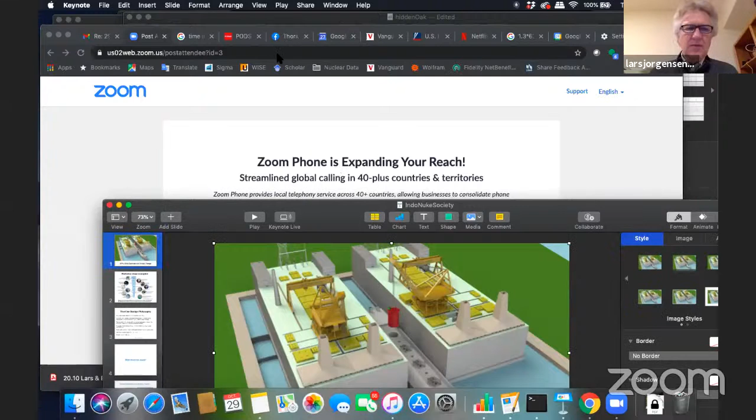What you see here is a picture of two 500 megawatt power plants with a can ship in between servicing it, bringing in fresh fuel and fresh reactor cores. On top, you can see yellow hatch covers. Because everything is low power, low pressure, we can have very large doors - these doors are 10 meters by 10 meters and weigh about 500 tons. So we can lift those up, giving access to all the components and making everything accessible for servicing. This is in contrast to a containment that has to contain high pressure in accidents, where you've got a thick reinforced concrete wall with small doors, and when you want to replace the steam generator, you have to cut through the concrete and steel to get to it.

So in traditional light water reactors, they tend to design things to last forever. We do want them to last a long time, but we have easy access to replace anything if it does need replacing. And some things like steam generators do tend to need replacing every 30 years or so.

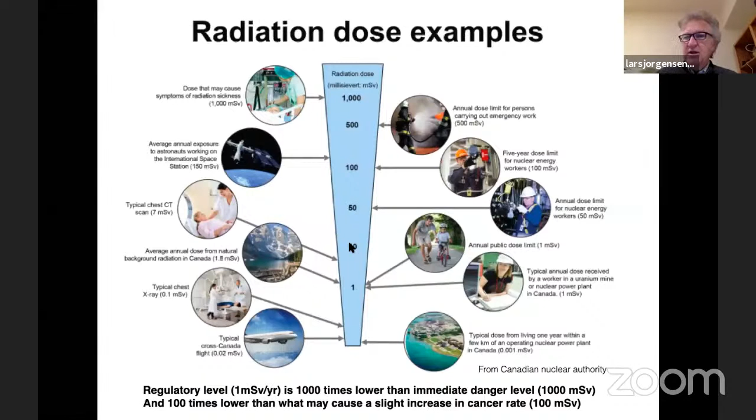It's really important to have the cost and passive safety so that no operator action or inaction can cause a release. There's no electricity or machinery required to prevent a release. I think that's important, not just from public perception of safety, but also from a cost viewpoint, because if we can have full passive safety, then the quality and regulatory review of the vast majority of the plant goes away.

And we're trying to directly compete with coal for cost.

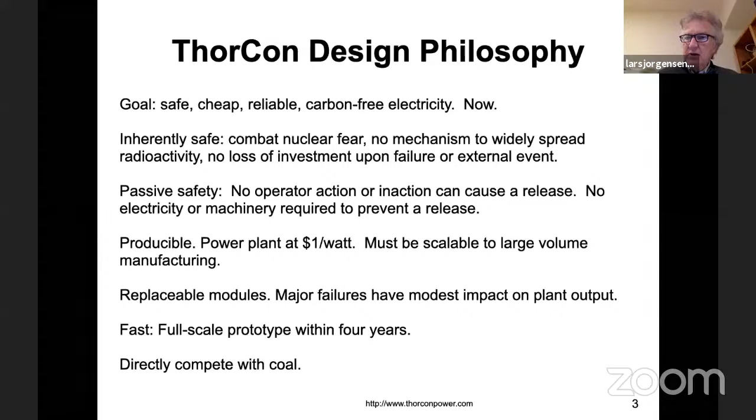A big topic is, what about the waste? The anti-nuclear activists have made a huge fuss over this, but I think it's important to understand just how much waste we have. If you look at the average electricity use for European or US, it's around 1 kilowatt on average, including industrial use. So if you look at how much that amounts to for 60 years life, that would be about a 600 milliliter bottle of water. That's your entire life's waste. Helping people understand how little that is, and therefore how easy we can control it, is an important thing we need to do.

If you were to generate that same electricity with coal, you would fill a 4 meter by 5 meter room, 300 meters tall, higher than the Gama Tower. It's the best illustration I can think of to say we generate very, very little waste. Our waste story is actually a positive thing.

See, can I make this go away? There.

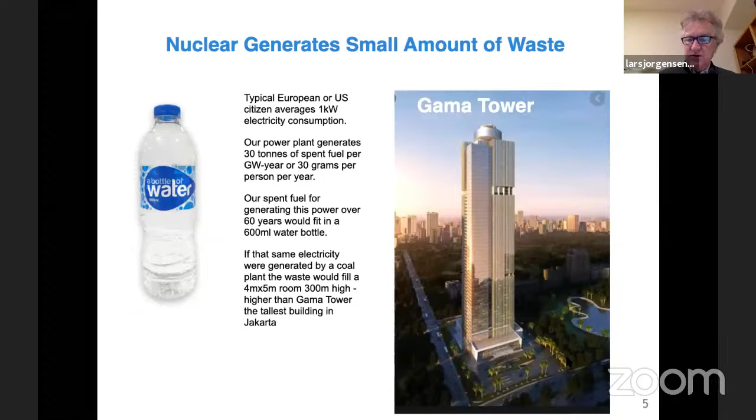In fact, we added 5 meters to the length of our hull. It used to be 175, now it's 180 meters long. Right here you can see some tall, thin tanks. That's where we're going to put our spent fuel for 80 years. It's the equivalent of a dry cask storage system. It's air-cooled by natural circulation, so we have an air inlet here and air exhaust there. It's protected by a 3-meter thick double wall hull that's filled with either sand or concrete. And we can store that until we're ready to do something else with it.

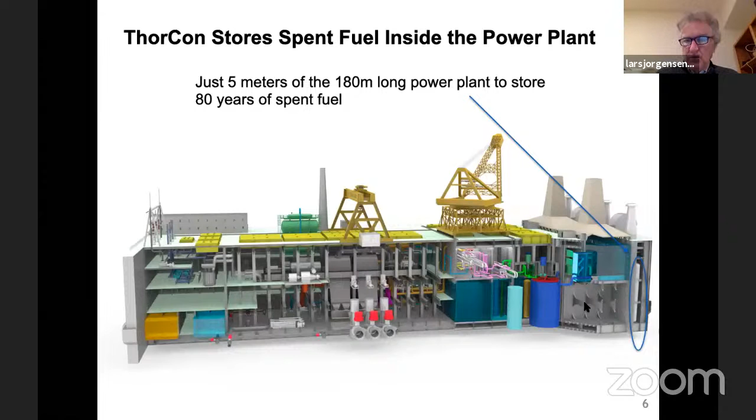By something else, the question is, what do you do for the very long term? I'm preferring the horizontal drilling method, taking advantage of the technology developed for oil exploration, where you drill a deep hole and then turn it horizontal and put the spent fuel in there. A single small island, in fact probably a single drilling rig, can handle all the waste from all of the nuclear power from Indonesia, even if you go 100% nuclear. So that just emphasizes how little waste we actually have to deal with.

The long-term disposal is actually the responsibility of BATAN, as I understand. So this should be taken merely as a suggestion, it's not really a plan. To be honest, we don't have to have the complete plan today, because we can store the stuff for 80 years at the power plant, and you can store it longer in dry cask storage if you wish.

Another huge issue is the cost. In order to make any big difference, we really need to be cost competitive with coal. If you're talking costs in the $5 to $10 per watt range, it just isn't going to be low enough cost to make a big difference in most of the world.

On the left, you see a picture of a ship that we designed and built. It's an ultra large crude carrier, one of the largest oil tankers in the world, double hulls. We built 4 of them. They were architected and the construction managed by Jack Devanney. He's the founder of Thorcon. They are almost twice the size of our power plant.

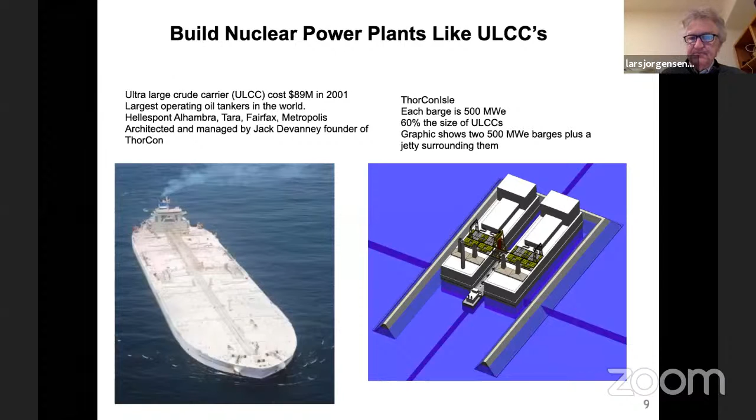If I look inside, I can kind of walk through here. Here's the spent fuel storage. This pond here is for removing decay heat, transporting the decay heat to the atmosphere. This is the reactor itself inside here, along with the pumps and everything else that's in the primary loop. So this is where the fuel stays, except when it's being shipped over to the spent fuel storage.

Then this is for off-gas storage to let it decay. These pipes, all this maze of pipes, are heat exchangers to take the heat from the reactor core and propagate it down until it becomes steam. And then this section here is the turbine.

Along with seawater inlet, there are 3 seawater pumps. We need 2 of them to run at full power, so it's a 3 by 50% plan for the cooling water. And then you have the generator, and then transformers and the switch yard. We use gas insulated switching gear in order to be able to fit the whole switch yard inside the power plant, rather than having a large area on land that is air insulated.

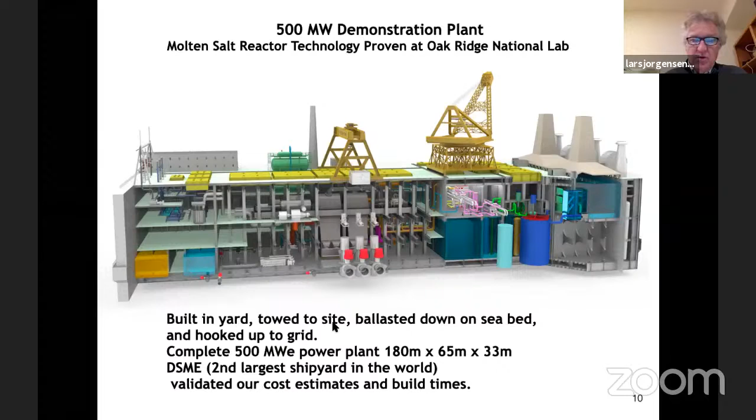So this whole thing can be built in the yard. It would be built in less than 1 year and on a fixed price contract, which is very different than current nuclear practice. Towed to the site and ballasted down to the seabed and hooked up. We've had our costs validated by DSME, who's the second largest shipyard in the world, so we're pretty solid on our costs.

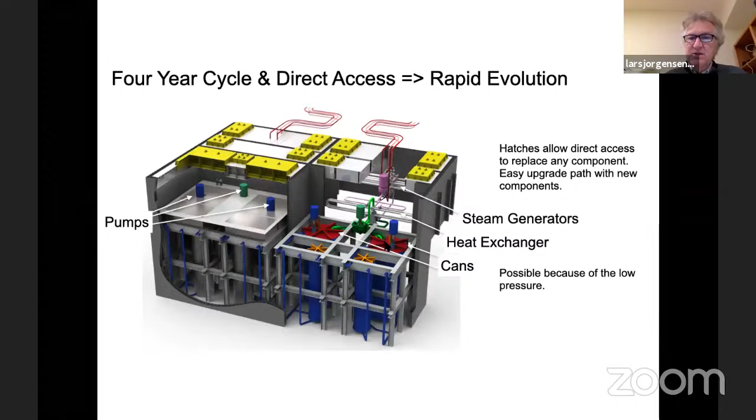I have a 4-year cycle of cans, because inside of it we have graphite, which does wear out. So we plan on using it for 4 years and then letting it sit and cool for 4 years, and then take out the can and replace it.

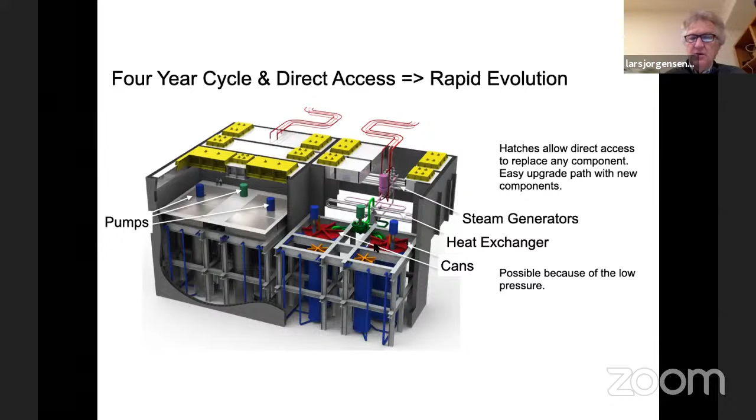This shows you the primary heat path. You have the pot, which is the reactor vessel, a pump, and then a primary heat exchanger. This all sits inside - we call this the primary loop. Then it goes to a secondary, heat is transferred to a secondary salt. It's also sodium fluoride, beryllium fluoride.

We use sodium fluoride rather than lithium fluoride because we haven't seen the availability of enriched lithium-7 on the market yet. If we can get that, we can switch the salts and everything else stays the same, but we don't want to put waiting for the lithium-7 onto our critical path. It means we have to buy a bit more enriched uranium, but it takes out that schedule uncertainty.

Then that goes to what's called a solar salt that's used in solar thermal plants. This is a nitrate salt that is compatible with water, so you have steam here. So the steam generator is from the solar thermal industry. It is what's called a helical, but it's really more of a snake pattern to be able to absorb rapid temperature changes.

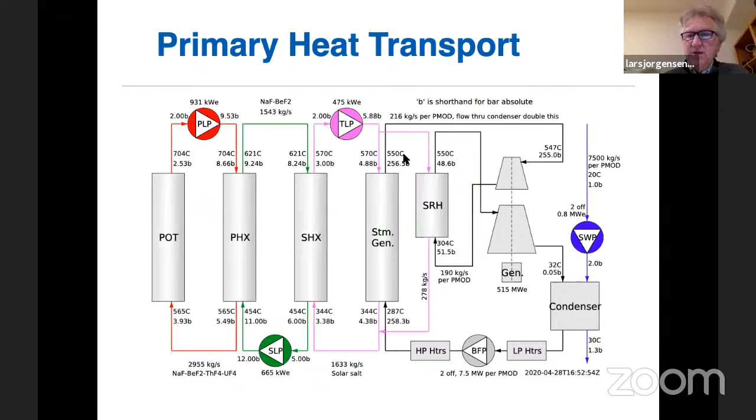This just shows you where it lays out. So here's the reactor core, the pump, the heat exchanger going to the secondary salt with its pump, going to the heat exchanger to the solar salt, which then makes the steam and goes off to the turbine. And here you can see it in context - these would be the high pressure feed water heaters.

This gives details on the steam generation side. I'm just going to highlight that we're up at over 47% efficiency if you have 20 degrees C water. It's about 46% if you have 30 degrees C cooling water. So depending on how deep and cold we can get the cooling water, we get different efficiencies, but this is in big contrast to light water reactors, which are around 35% efficiency, which means we need a lot less cooling water, fewer pumps. All of the equipment to transport the heat is similarly scaled down.

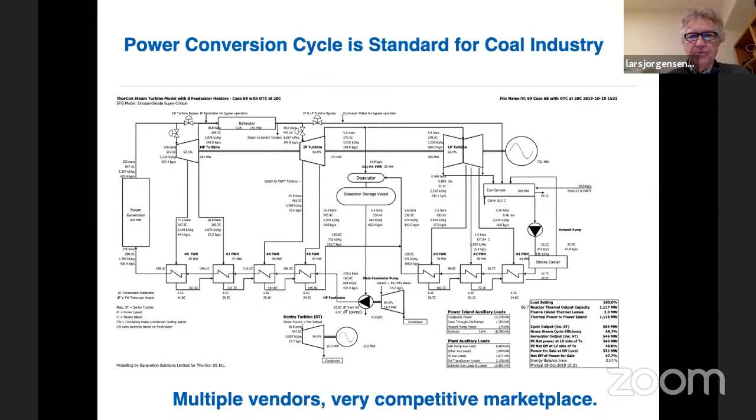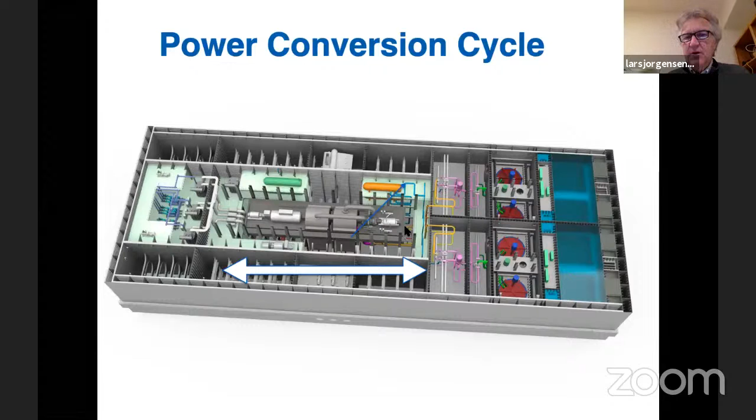If you look at the whole power plant, the turbine generator makes up a big portion of it - that's this section right in here. And that portion is going to be directly cost competitive with what's used for coal because we're buying it from the same vendors.

Get inside the can. We have the reactor vessel itself. It's not quite spherical, but it's not too far from. It's filled with graphite inside.

Salt enters at 565 and comes out at 704. It goes through the pump and the heat exchanger. This is a can for the off gas.

We have a flow of helium that comes in through a dry gas seal that flows down. That prevents radioactive gases from being able to migrate up into the motor area. And then that sweeps the xenon and krypton that comes off of the fission process over into this off gas tank. So we have enough storage here for the first week of decay time.

We remove about 4% of the salt flow to send to a spray ring to release the off gas from the salt. Xenon and krypton have a very low solubility in the salt, so spraying it does release it. And then that comes out at about 1 liter an hour, and the sweep gas goes by at about 1 to 2 liters per minute to sweep that off and into this tank.

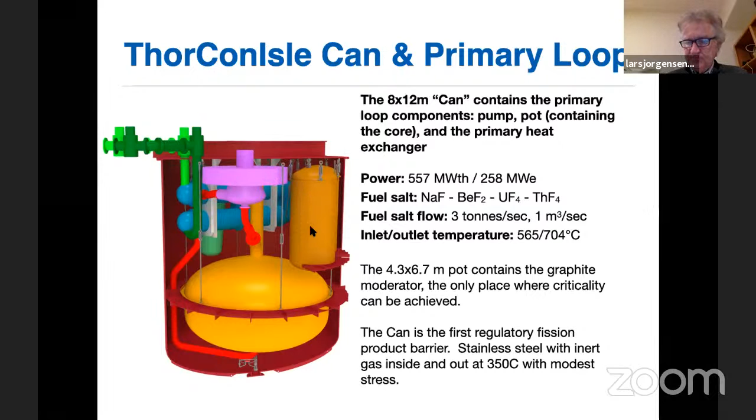So there's a total of 15 cubic meters of fuel salt in the primary loop. We have a makeup fuel tank that's about 2 cubic meters. The fuel in the core is just enough to be critical.

So we don't have any burnable poisons. Instead, we add on the order of 1 liter of makeup fuel salt per day. That gets added several times each day. So there's no excess reactivity in the core.

We also have about 1 cubic meter of thorium makeup salt to reduce the reactivity. That's important because when you're running the power plant, you're pumping fuel salt out of the core, and you'll lose 200 to 300 pcm of delayed neutrons. When you stop the pump, that reactivity comes back, and we need to add thorium to compensate for that so that we don't get too hot.

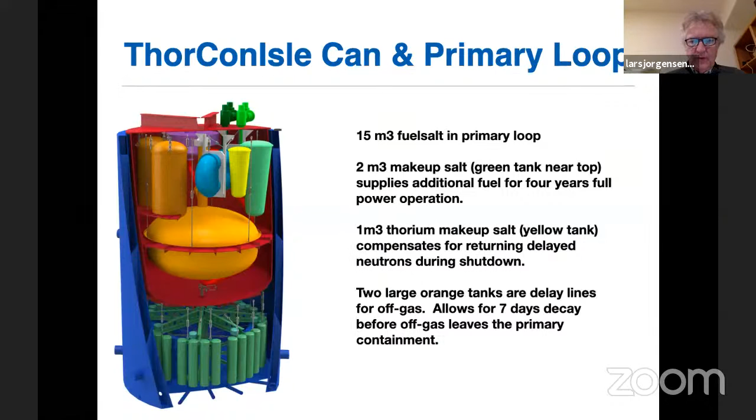Down below, we've got a freeze valve, which you can't really see here. The freeze valve is frozen salt in a pipe that is kept frozen by actively pumping cold helium to keep it closed. If you stop pumping the cold helium, the heat capacity of the hot salt adjacent to it is sufficient to open that valve.

So if anything breaks that cuts off the flow of helium, we're going to end up opening the valve and draining into these 32 drain tanks. As you can see, they are spread out so that once you're down here, K effective is about 0.5 or 0.6, even if you surround this completely with water. So once it's drained, you know absolutely it is not critical. It will not become critical.

The drain tanks are surrounded by an inert gas, probably argon, and then that radiates out to a steel tank wall here, and inside that is 0.5 meter of water. So that'll boil the water and send the steam up the path here through the pipes to a radiator on the bottom here, which will transfer the heat into this water and evaporate that water.

There's 5,000 cubic meters of water for a 555 megawatt core. That's about 10 times as much water as the AP1000 has. That means we have enough water to last us for 165 days. This is at atmospheric pressure, so anybody with a pump can push more water in.

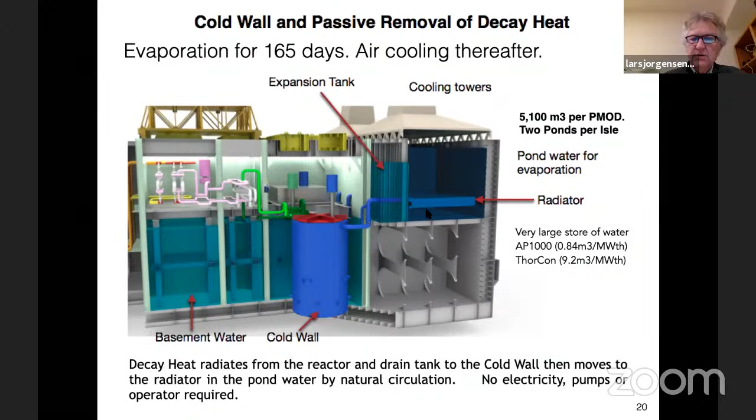We do plan on building a full-scale pre-fission plant. We can use that to test all manner of tests. There's no fission, so there's very little radioactivity, but we can use electrical heat and confirm that we do all the necessary cooling and containment. We can even simulate severe tests by adding electrical heat to mimic the decay heat and show that it does indeed remove the heat and that the valves and everything open passively.

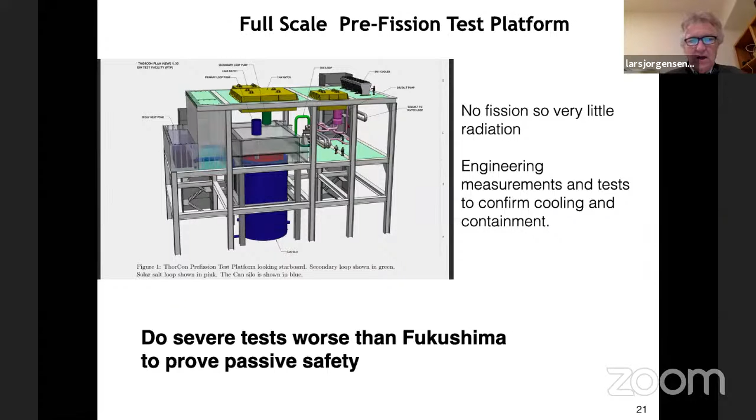First step is just to simulate it. This is a simulation we have of the system showing the temperatures in a whole variety of locations in the power plant.

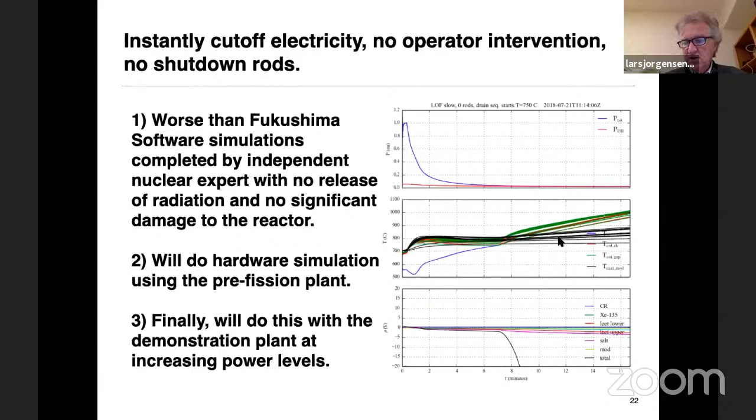We do plan, once we have first run things through simulation and then through the pre-fission plant and then through the demonstration plant at low power and stepping up into higher powers, until we have done this full station blackout with turn off all the electricity instantly, stop the cooling water, no operator action. This is much worse than what happened at Fukushima.

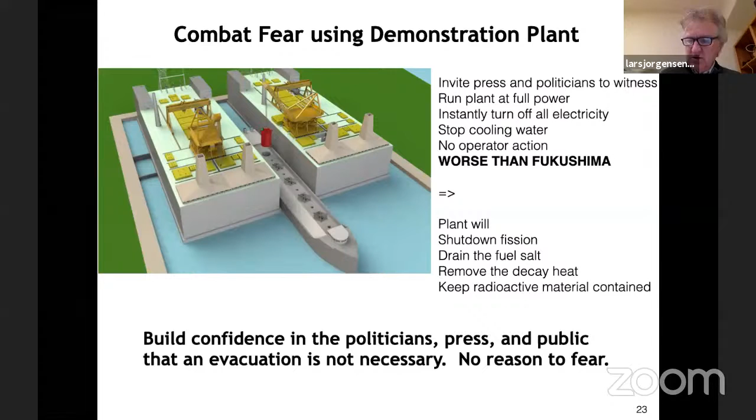And do that with the politicians, the press, and the public present, so that they get not just a reassurance from words by engineers, even the regulator, but that they get to have personal experience and they feel it, I want to say, in their heart. It's not just head knowledge, that the plant will take care of itself and they don't need to do a big evacuation, which, if you look over time, that's been the major harm from nuclear accidents. It has not been the radiation, it's been the evacuations that have caused the most harm.

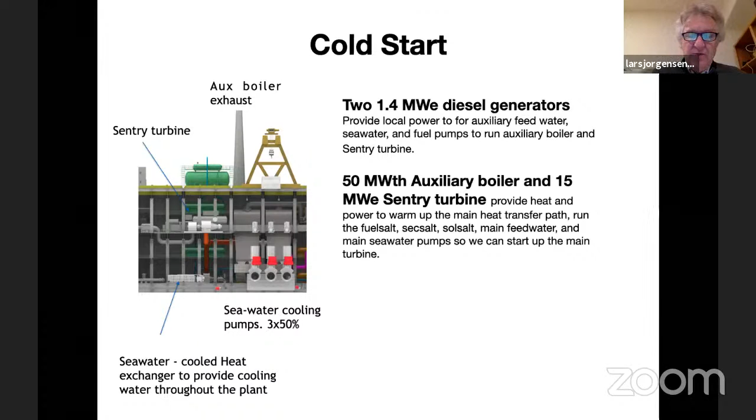We are designed for cold start, so we have 2 1.4 megawatt electric diesel generators. Those are enough to provide local power to start the auxiliary feed water, seawater, and fuel pumps. Those will drive an auxiliary boiler, which is basically a diesel boiler to provide 50 megawatts thermal. And there's a small Sentry turbine of 15 megawatts. That's enough for us to heat up all the salt and get all the pumps going to start the fission process. So we can start our power plant and bring up the fission island with even if the grid is completely down. That's for a full cold start.

Once we're up, if the grid goes down, we can go to hot standby, where the power plant goes to minimal fission power, but we keep all the salt loops moving. And we can tolerate many hours worth of outage and then come back up and ramp the heat up, so we can be the hot standby black start capability that was so wanted for Jakarta in that outage a year and a half ago or so.

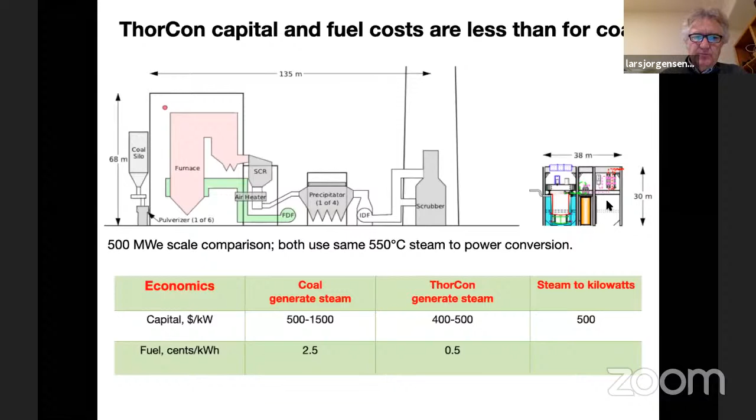So we build it in a shipyard, tow it to the site, ballast it down, and then every 4 years come and service it to bring in new fuel. The shipyard initially will be an established shipyard. That is our factory. We don't have to design a new factory and debug it and bring it up the way a lot of small modular reactor plans are. We use the existing shipyards. They've been perfected for 40 years. It's an intensely competitive field, and they've got a lot of surplus capacity right now. So it's a good time to go negotiate with them.

We have already talked with DSME, and they are willing to set up a shipyard in Indonesia that would build the power plants. So once we've got the first several built and know what we're doing, we'll bring some people over to train at DSME, and then DSME will go over to Indonesia and build a shipyard there and initially staff the lead positions, eventually being replaced by Indonesian staff and running so that Indonesia builds its own power plants and builds them for export.

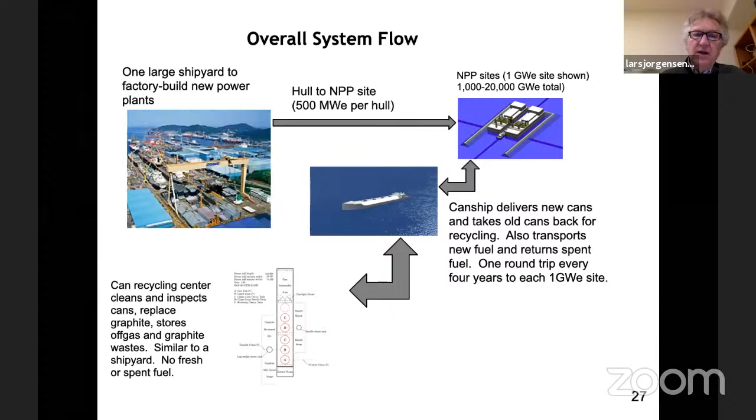And I'm running low on time.

So a good-sized shipyard can build 20 gigawatts worth of power plants per year. Light water reactors, I don't think the entire world could build 20 gigawatts worth of light water reactors a year. There just isn't enough huge foundry space.

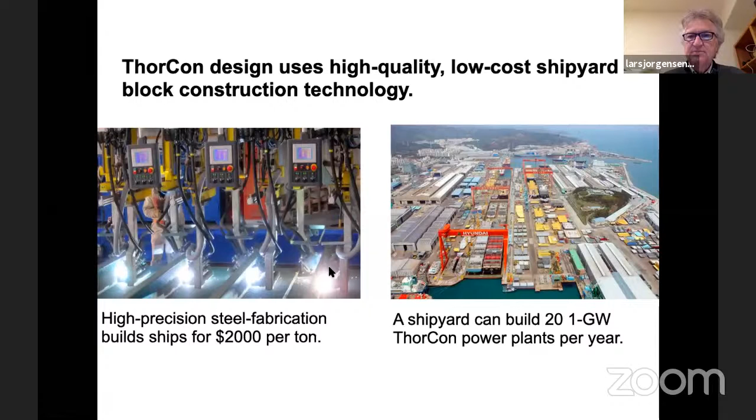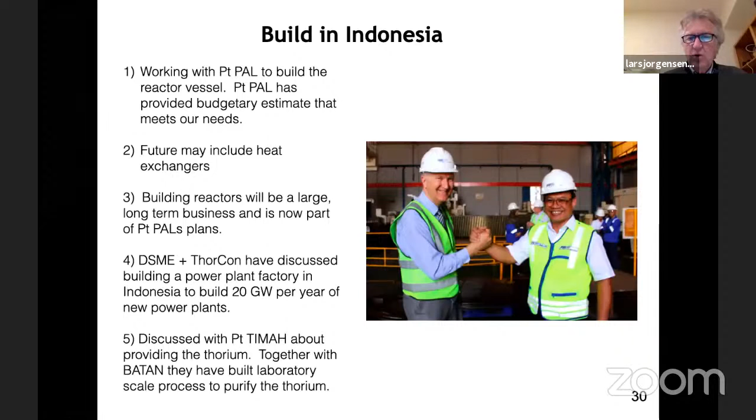We're working with the national labs to build sensors and to make salt measurements. Those contracts are getting close to being done now. We've worked with PT-PAL to look to see if they can build the cans and the stuff inside. We believe they have the technical capability. We still need to work more with them to work out the details, but that looks very promising.

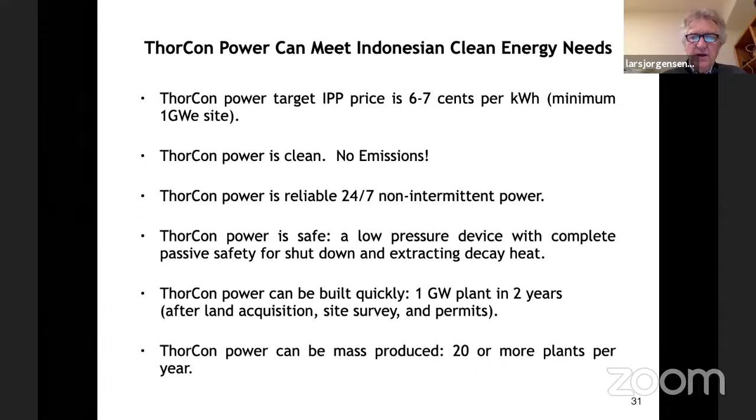We think we can hit below 7 cents per kilowatt hour. So we've been talking with PLN a lot about that. Recent progress, well, we went to DSME and confirmed the costs with them as well as Doosan.

The steam generator is designed in Denmark and is built for solar thermal plants. That's looking pretty solid. We've been working a lot with Materion, the world's premier supplier of beryllium fluoride, to work out details for that. We are progressing with the laws and regulations in Indonesia. Bob's been doing great work moving pieces to be ready.

We are in discussions with an international organization for a safety review, and we're just about done with our contracts with the national labs. That's the end of this part of the presentation. I think I used all my time.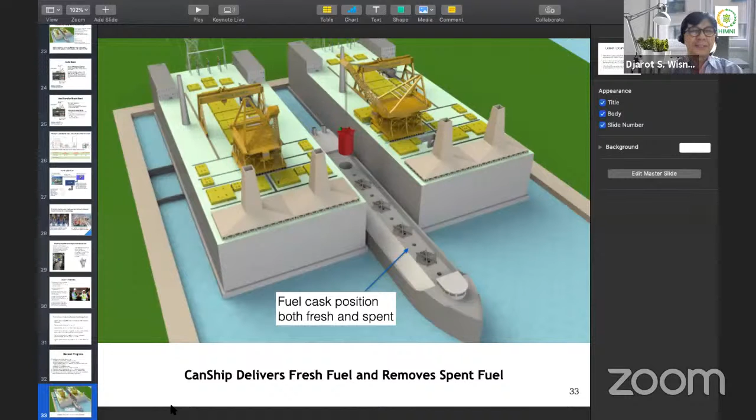Okay, thank you, Lars. Well, it's very interesting. Your goal is not to be competitive with the pressurized water reactor, but cheaper than coal. It's very interesting. And you also consider, well, based on the proven technology of the experimental molten salt reactor of the Oak Ridge National Laboratory long time ago, in the 1960s, I think they operated that reactor.

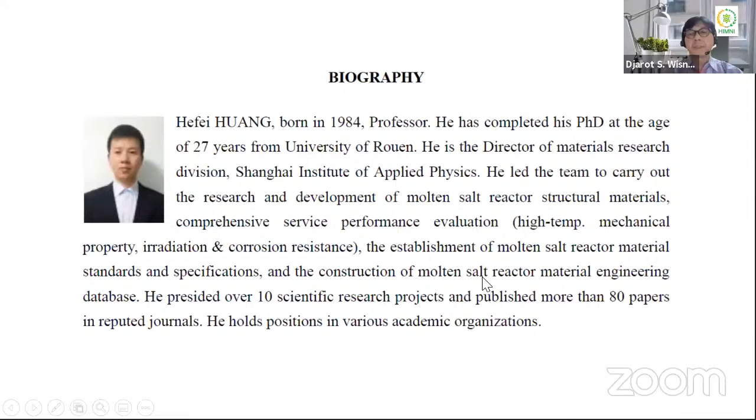Okay, thank you very much for the introduction. Can you see the slide? Yes. Okay, good morning and good evening, everyone. I'm really glad to have a chance to introduce the presentation here. Today the title of my presentation is the progress of the TMSR in China.

This presentation includes 4 parts. First of all, I will introduce what is the MSR, and then the motivation, the progress, and finally the perspective of the TMSR.

The TMSR project was launched at the beginning of 2011 by the Chinese Academy of Science, and the full name is Thorium Molten Salt Reactor Nuclear Energy System. We call it also the TMSR. The aim is to develop thorium energy and non-electrical application of nuclear energy based on TMSR during the coming 20 to 30 years.

This slide shows the TMSR development plan. We have already finished the mock-up reactor before the end of 2019. Now we are constructing the test reactor, the 2 megawatt thorium liquid fuel test reactor. We call it TMSR-LF1. After we finish this, we are now applying for funding to support the research reactor, which should be finished around 2030.

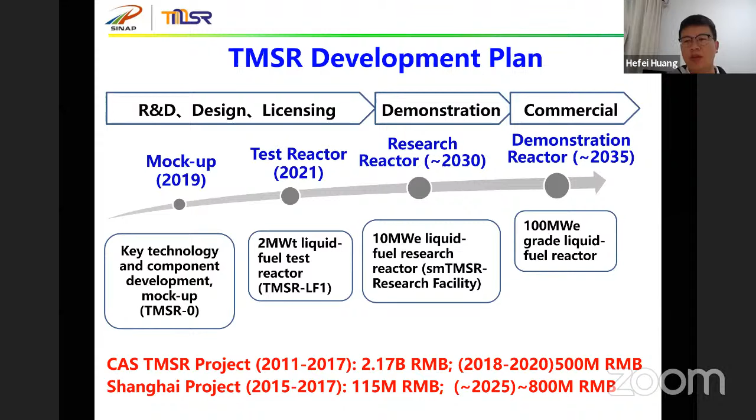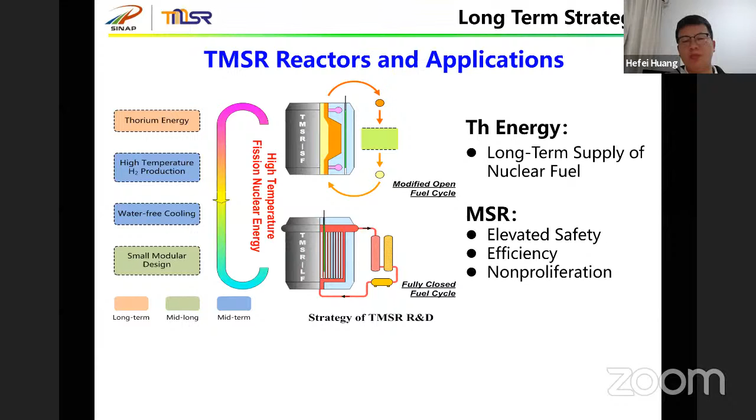The TMSR reactor possesses a lot of advantages, such as thorium energy use, high temperature hydrogen production, water-free cooling, and small modular design. Our TMSR application will focus on optimization for high temperature based hybrid nuclear energy applications, and also for utilization of thorium with prior processing.

So next is the motivation for the TMSR. This slide shows the energy structure of China before the end of 2012. We can see there are more than 620 coal-fired power plants, and the total accounts for about 66% of China's total energy consumption. So coal dominates primary energy consumption in China.

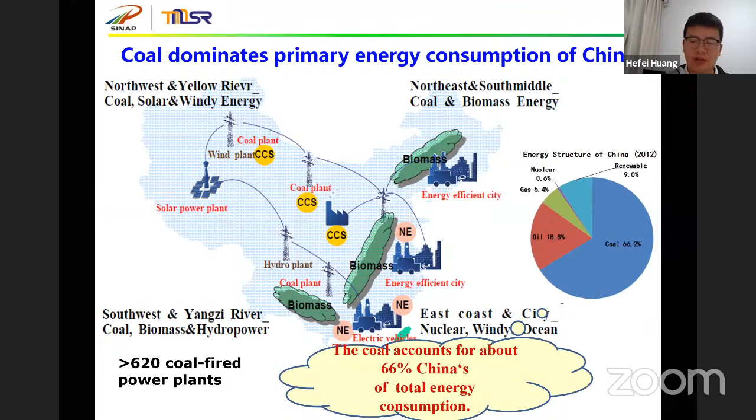We can also see at that moment wind was abandoned in China. Much of the electricity produced by vast wind farms goes unused. The grids are unable to accommodate the fluctuating source of power and the rising overcapacity in the country's total power generation.

From 2010 to 2016, 150.4 million megawatt hours, or as much as 16% of wind generation, was curtailed. The opportunity cost of wind power curtailment in China is estimated to exceed 1.2 billion US dollars.

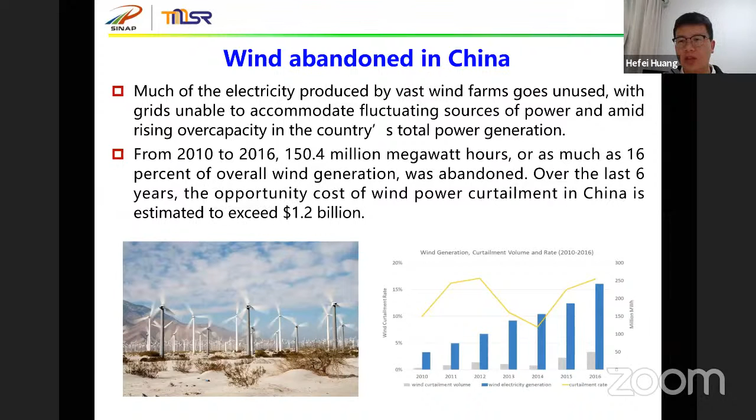So now we propose a solution: the clean energy system. The nuclear energy system produces heat and/or electricity. The renewable energy system produces electricity and/or heat. Both can produce hydrogen for energy conversion and storage, which is also used to lower CO2 emissions of fossil fuel.

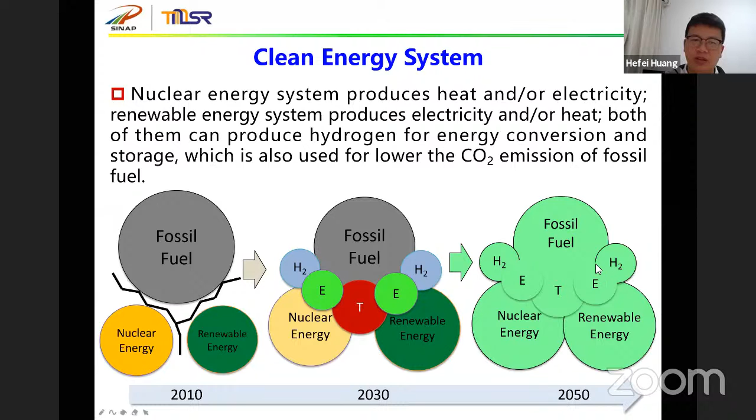The molten salt reactor is one of the Generation IV nuclear reactors. The fuel cycle is closed and the size can be up to 1,000 megawatts. The application includes electricity, hydrogen production, and actinide management.

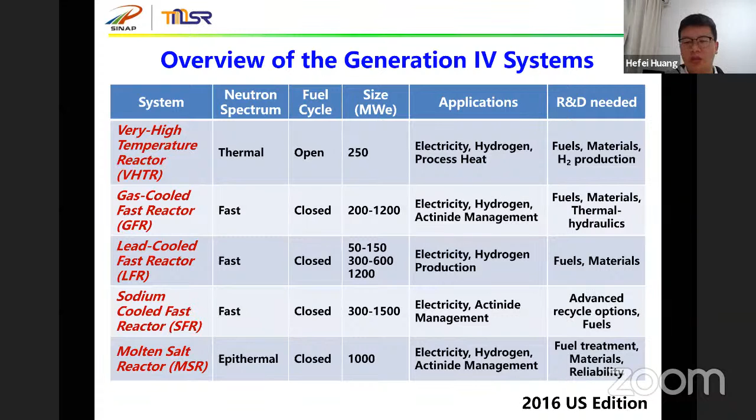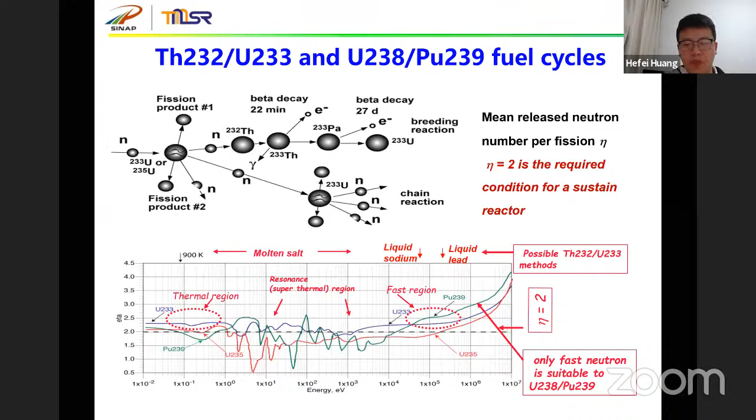The molten salt reactor is suitable for generating electricity, comprehensive utilization, and modular design. For example, thorium utilization, online refueling, inherent safety, and outlet-free cooling.

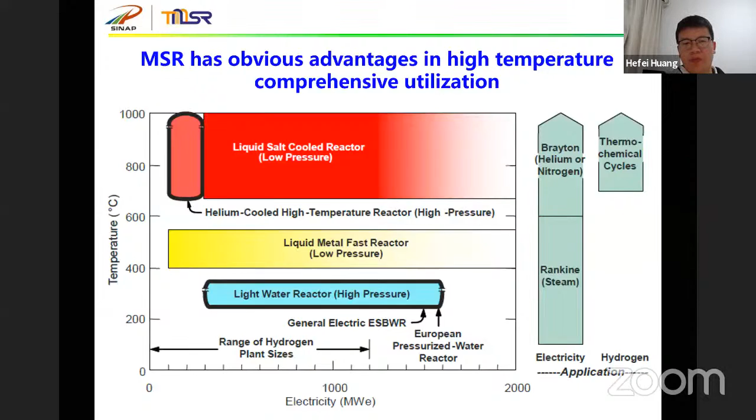So finally, we choose the solution of low carbon new energy: the high temperature thorium molten salt reactor plus hybrid energy utilization.

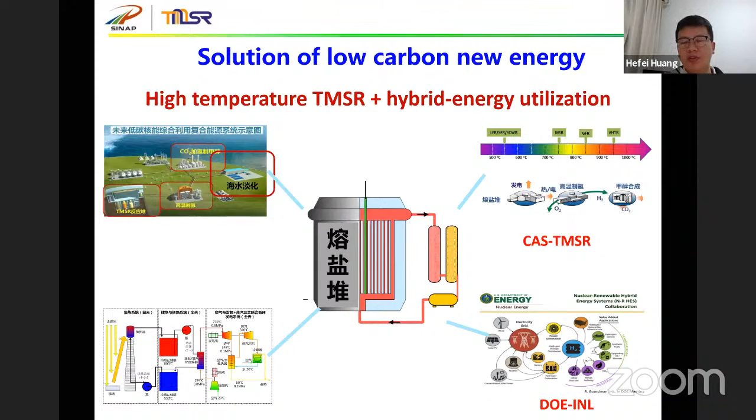This is the mock-up reactor without fuel. Now we are constructing the experimental molten salt reactor, the TMSR-LF1. Next, we want to apply for funding from the government to develop the small modular MSR, with energy output ranging from 10 megawatts electric to 100 megawatts electric—a small modular MSR.

We have already carried out a lot of fundamental research, and now in the Jiading campus we have built all types of laboratories for MSR technology R&D, for example the material testing lab, salt property labs, irradiation facility, hot cell, and also a supercomputer.

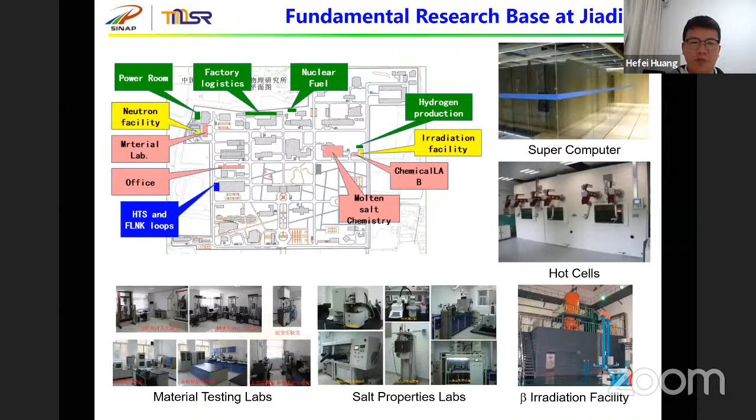Since 2011, this project has been launched by the CAS. We started to carry out wide collaboration with institutes also belonging to the Chinese Academy of Sciences, universities, and industry companies.

Before 2016, we had already carried out a lot of collaboration with American National Laboratories and famous universities, for example Oak Ridge Laboratory, Argonne, MIT, and University of Wisconsin. But since Trump became president, cooperation between China and the US became very hard to continue. So now our cooperation is mostly carried out between Chinese universities, institutes, and companies.

In the past 5 years, we have made a series of progress in the R&D of MSR technology. Now I will give you a brief introduction to this.

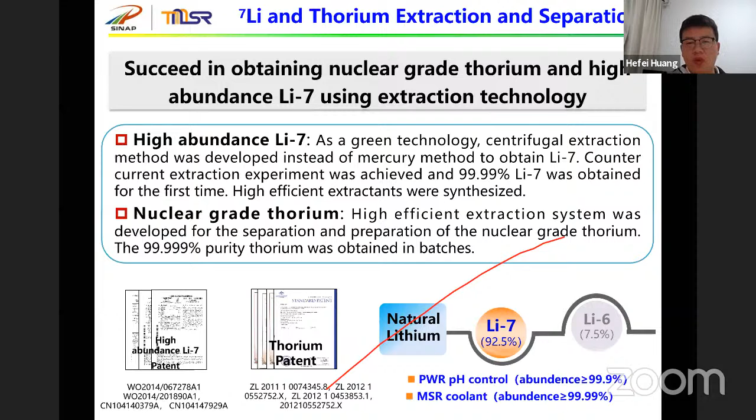Okay, the salt production and purification. The high purity FLiNaK batch production, characterization and purification has been finished. We have built the synthesis of FLiBe and beryllium control method, and established the FLiBe thorium uranium fuel salt thermodynamics database.

For materials, first is the nickel-based alloy. We have developed the technology for smelting, processing and welding of the nickel-based alloy UNS N10003. We have also developed the Chinese version, GH3535. The smelting technology can now reach 10 tons, with processing and welding performance comparable to Hastelloy. The deformation processing technology for nickel-based alloy with high molybdenum content has been finished.

The largest UNS seamless pipe has been fabricated. Now in China, we can fabricate pipe with a diameter of 141.3 millimeters. This parameter is not right, it's 141.

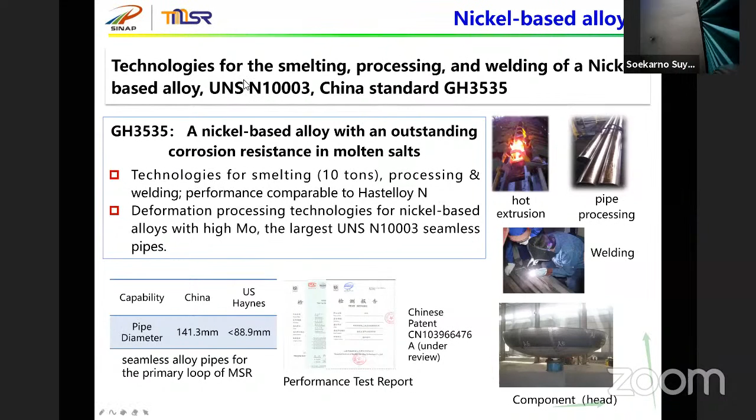Next is nuclear graphite. We are already developing ultrafine grain nuclear graphite for MSR, involved in the establishment of the ASME code for MSR nuclear graphite.

In China, at this moment, we have two types of ultrafine nuclear graphite: one is NG-CT-50, another is T220. The pore diameter is less than 1 micrometer, which ensures better infiltration resistance than existing nuclear graphite.

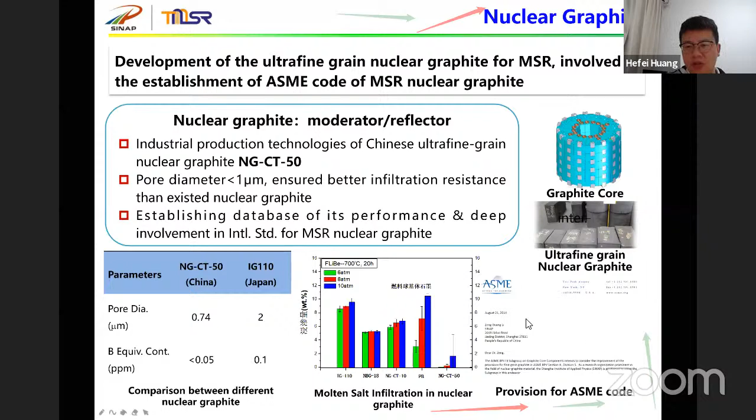We are also establishing a database of its performance, with deep involvement in nuclear graphite. You can see the main parameters, the molten salt infiltration experimental results, and the ASME code provided by us.

Normally, people see the molten salt reactor as a chemical reactor. Corrosion control is a big challenge for this technology. After a lot of research, we have achieved control of structure material corrosion through alloy composition optimization, salt purification, and surface treatment.

For composition optimization, we optimized the alloy composition to degrade the diffusion of chromium. For salt purification, we modified the purification technology to control impurity content. And we developed FTD coating technology to improve corrosion resistance.

Now we have solved corrosion control in fluoride salt. For example, for GH3535, the static corrosion rate is less than 2 micrometers per year.

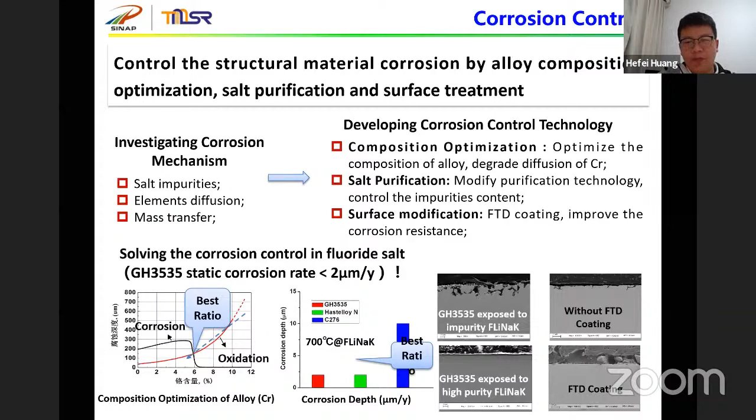And we have already finished the R&D of components, including the salt pump, the freezing valve, heat exchanger, control rod test facility, fuel sphere loading facility, graphite structure testing facility, pressure meter film, and the ultrasonic flow meter benchmark platform.

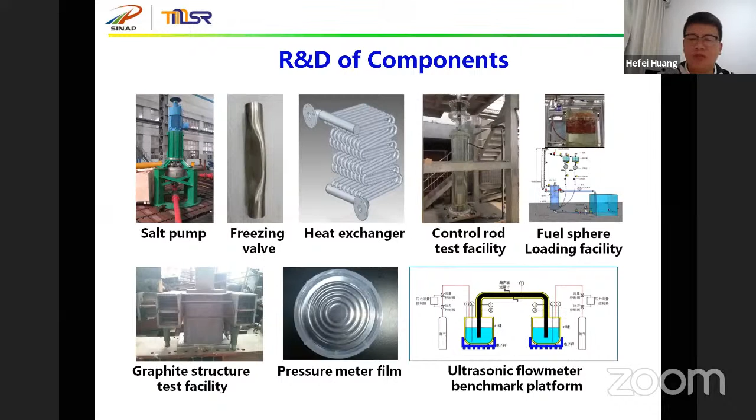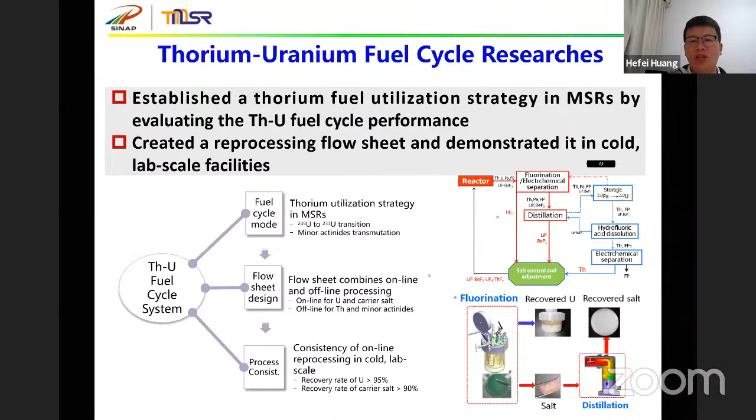For thorium-uranium fuel cycle research, we have established a thorium fuel utilization strategy in MSR by evaluating the thorium-uranium fuel cycle performance, created a reprocessing flow sheet, and demonstrated it in cold lab scale facilities.

As for processing technology, the fluorination and distillation technology has been used for fluoride salt in cold experiments, and we are already developing fluoride electrochemical separation technology. For example, for fluorination for uranium recovery, we have verified the process with in-situ monitoring, using the freezing wall technique to mitigate corrosion delivery from high temperature liquid fluoride melt.

For fluoride salt loops, we have constructed high temperature fluoride salt loops and developed equipment to be used with fluoride salt, for example the pump, heat exchanger, valve, seal, and pressure meter.

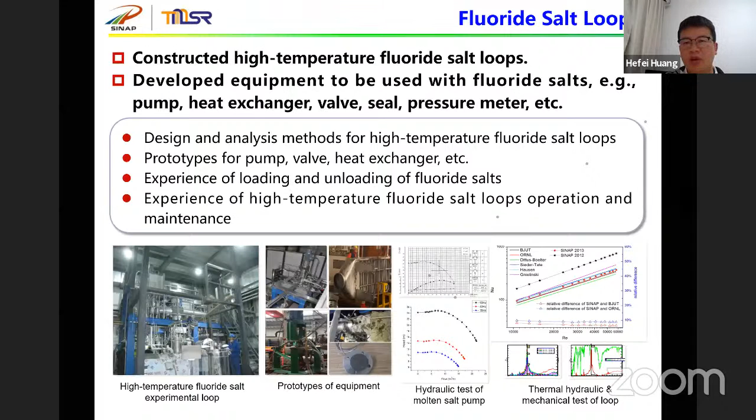Tritium measurement and control: we have achieved online tritium monitoring, tritium stripping using bubbling, tritium separation with cryogenics, and tritium storage.

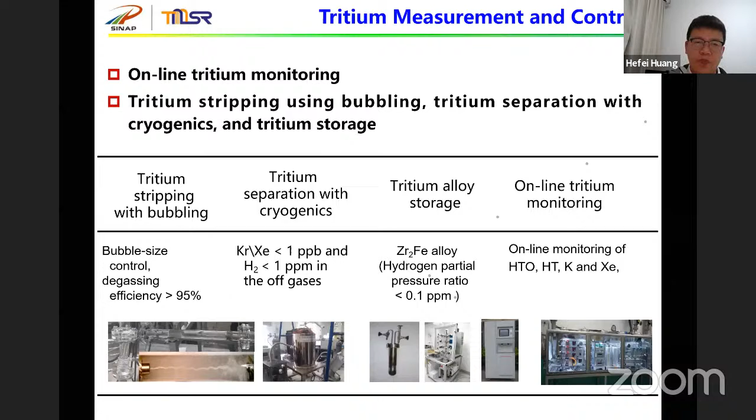This slide shows the general description of the TMSR-0. This mock-up reactor is an integrated facility via the scaling method. It is the key facility for design validation, licensing, simulation for operation, and training operators.

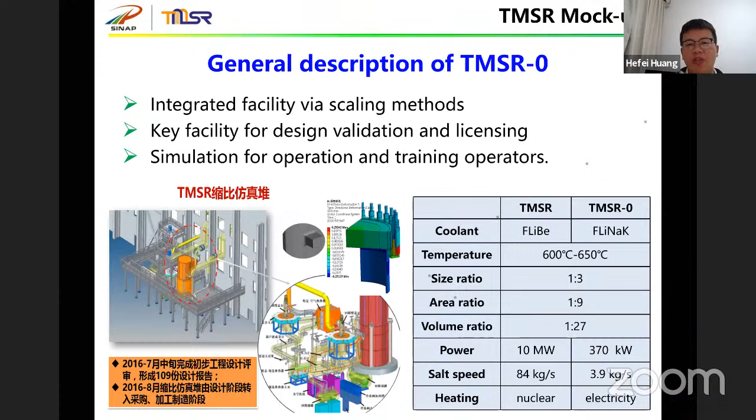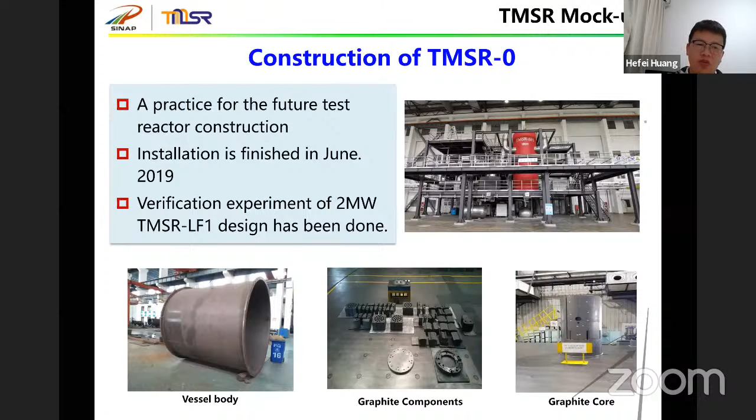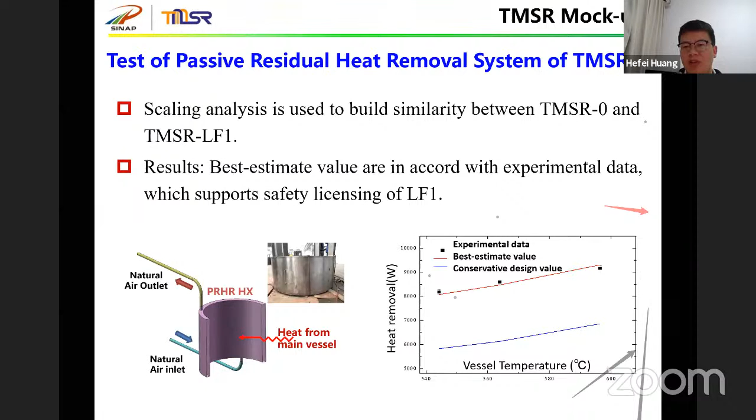We tested the passive residual heat removal system of the TMSR0. We did scaling analysis to build similarity between TMSR0 and TMSR-LF1. The results show that the best estimate values are in accord with experimental data, which supports the safety license of LF1.

Now the TMSR-LF1 is a 2 megawatt thermal TMSR test reactor. It demonstrates the operation of an MSR with liquid fuel, demonstrates the thermal cycle and its features. It's also a platform for future reactor and thermal cycle R&D.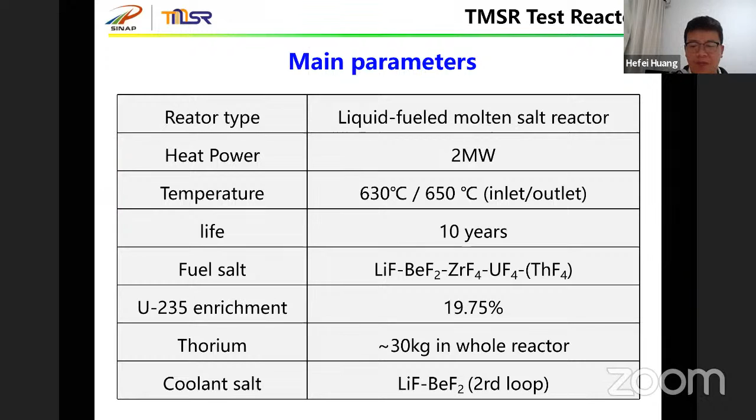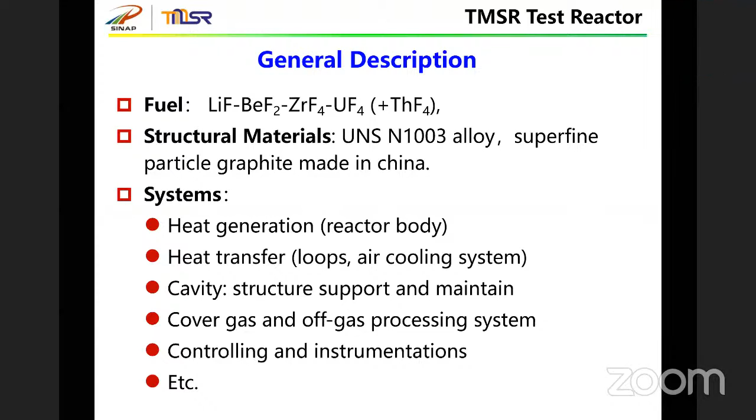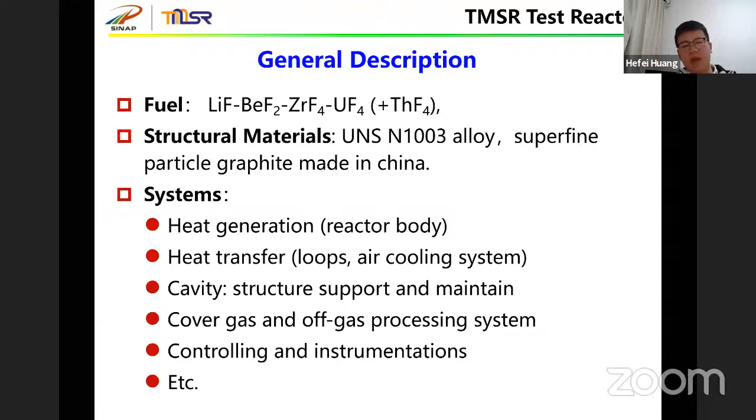For structure material, we use two main materials: one is the UNS N10003 alloy, and the other is superfine particle graphite. Both are made in China. The system includes heat generation, heat transfer, the cavity including structure support and maintenance, the cover gas and off-gas processing system, and also the control and instrumentation.

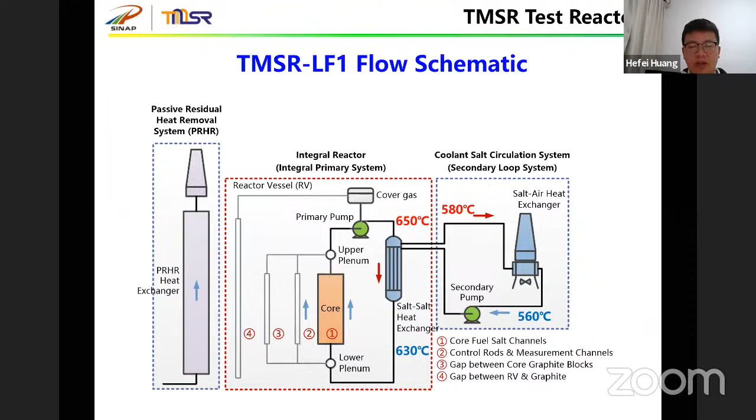Now, for the TMSR-LF1 licensing, the site selection work has completed. The site assessment report was approved by the NNSA in December 2018. The PSAR report has been reviewed, and the construction license was approved by the NNSA in January this year.

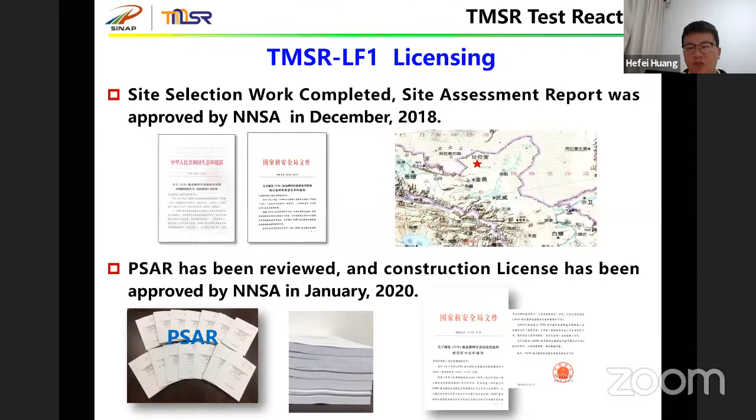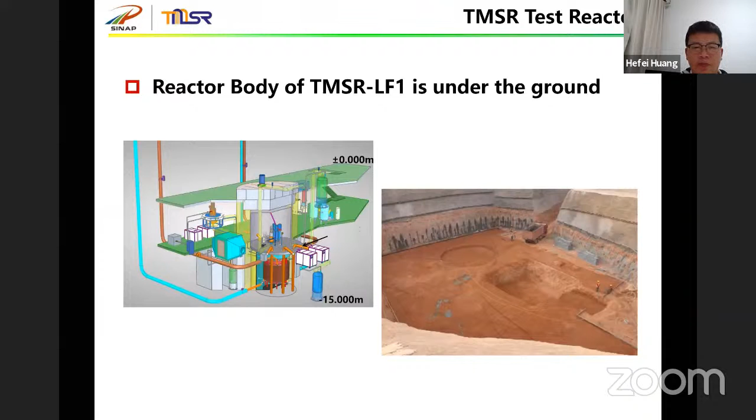This slide shows the reactor body of the TMSR-LF1 is underground, around 15 meters below ground. This slide shows the construction of the TMSR-LF1 building. We started the FCD on March 29th this year, and finished the zero level at the end of June. You can see this shows the main building of the reactor.

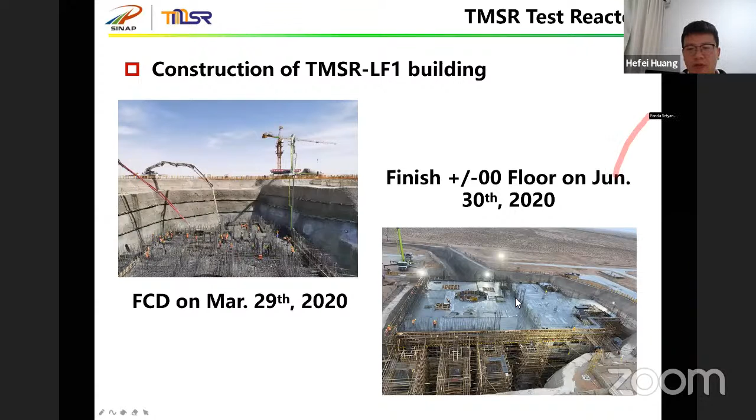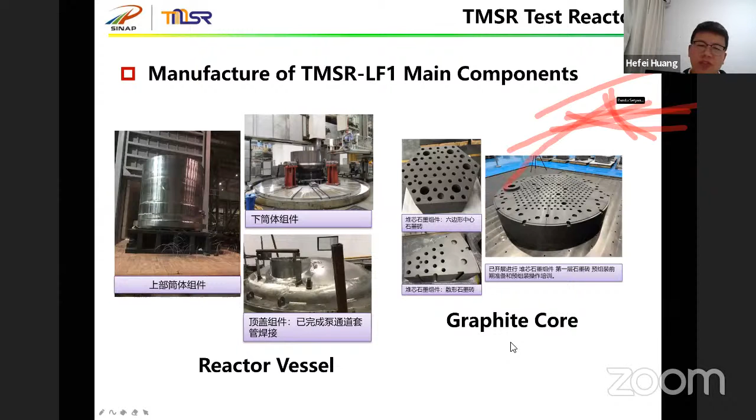This is the CPM of the TMSR-LF1 project. This slide shows progress up to June this year, but the current situation is the main building of the test reactor has been completed, and the equipment installation is in progress, meaning the vessel and the graphite component.

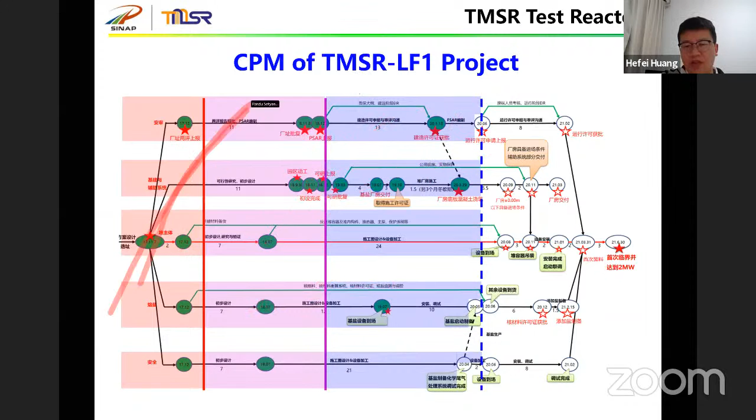So finally, the perspective on TMSR. The Chinese proposal for the TMSR roadmap is based on the technology had in lab scale during the last few years. The TMSR team proposed the roadmap as follows: to complete construction of a test reactor by the middle of 2021, to complete construction of a small modular TMSR research facility around 2030, to complete construction of the TMSR fuel salt batch pyro-process demo facility, and to realize thorium uranium fuel cycle usage based on the three-step strategy by the early 2040s.

This is the three-step strategy for the thorium uranium fuel cycle. Step one is the batch process. The fuel is LEU plus thorium, with online refueling, removal of gas and fission products, and discharge of all fuel salt after 5 to 8 years. We extract the uranium, thorium and salt, FP and MA for temporary storage.

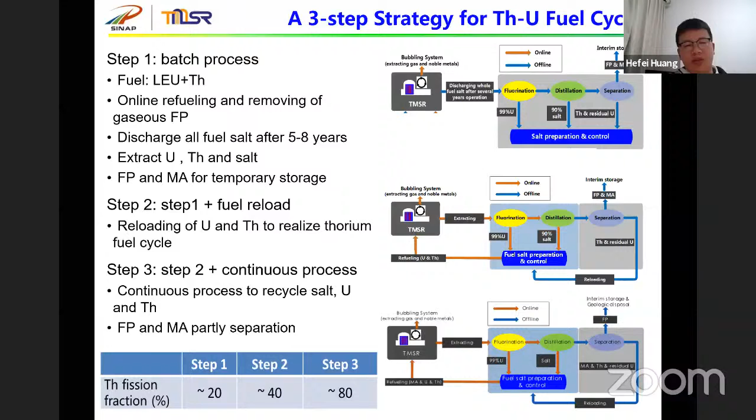So this is our image for the future, the TMSR integrated hybrid energy park. In this park, we have the TMSR, CSP solar energy, wind power, molten salt storage, and hydrogen production. We will combine all of this to become a hybrid energy park in the west of China.

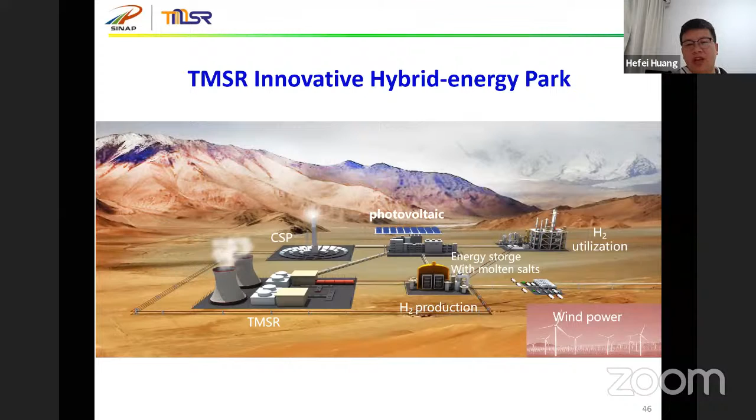That's all. Thank you very much.

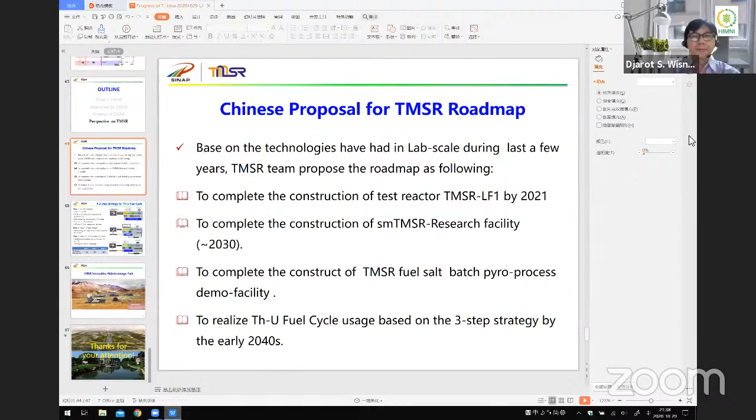I will invite 4 representatives from the audience. The first person is Professor Abdul Waris from Bandung Institute of Technology. The second is Dr. Genirina from Indonesian Nuclear Society. The third is Mr. Yaryanto from Batan. And the fourth one is Dr. Andang from Gadjah Mada University. With this various background, I think they will give comments and their view.

And I give each 5 minutes, and you have to make clear to whom you want to ask or comment. Please, for the first person, Professor Waris. Okay, thank you, Professor Djarot. Good morning, Dr. Lawson, and good evening Professor Hefei Huang.

Thank you very much, Dr. Lawson, for a very important presentation regarding the most ready MSR design to be constructed for the time being. As we understand, the ThorCon MSR is very unique, very fast fabrication time, built in a shipyard and can be carried out directly to the purpose site and so on.